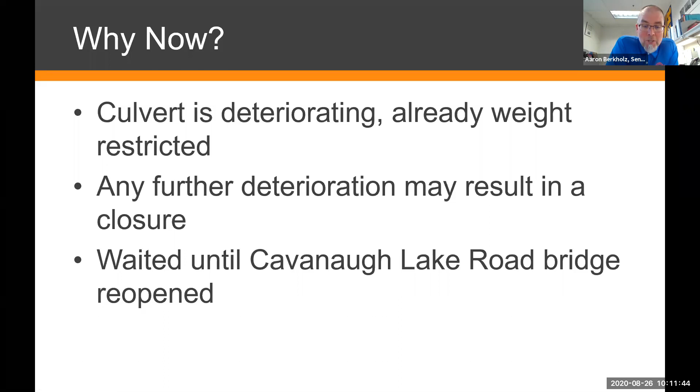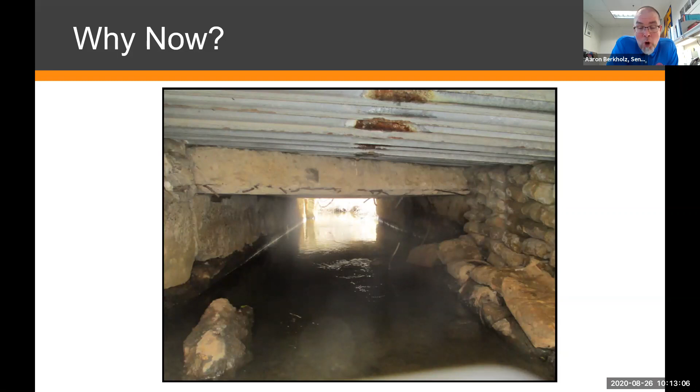So our intention in undertaking this project with Salem is to remove the existing deteriorating culvert. We'll be replacing the existing culvert with a new aluminum box culvert. We'll be installing new guardrail, and we'll be placing HMA hot mix asphalt pavement there at the culvert. It doesn't extend very far in either direction, but there will be new asphalt placed at the culvert.

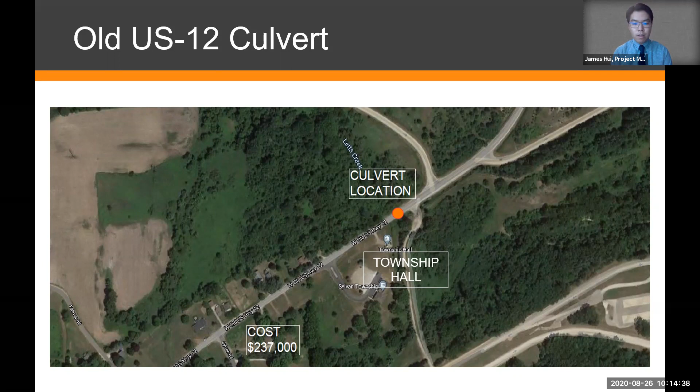So let's dive into this slide. Just to show you where the culvert is, the orange dot shows where the crossing for Letts Creek goes on old US-12. We will basically just be doing a hard closure at that orange dot. If you can see the driveway just northeast of there for the FCA proving grounds, and also the Township Hall driveway just southwest of there, that won't be in our closure itself. But we will have one barricade farther down by the ramp on the northeast side, and then one barricade down by Sylvan Road, just to inform people trying to drive through that this culvert is closed at this location. Next slide.

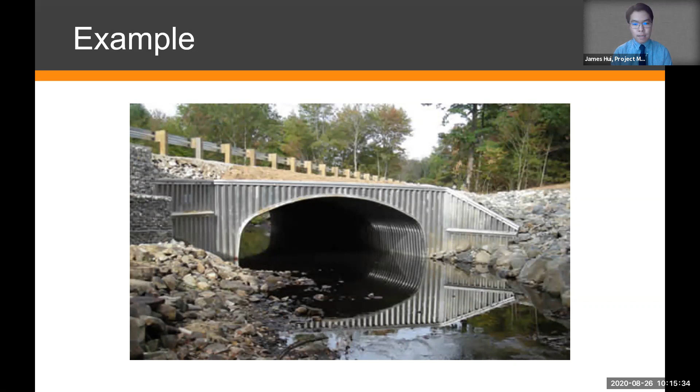So the construction schedule, we do plan on starting mid-September, and it will end mid-October. We're currently talking with Salem, our contractor, about trying to push up construction due to concerns for elections and the ballots. We don't want to deter motorists in the month of October. So we are working with the contractor, and as of now, we haven't gotten an answer back on if they could push up the work schedule. But the contractor did assure us that they can get done within a month. So we do hope to have this open back up in mid-October. This will be weather dependent, of course, and also dependent on contractor delays. But we will try our best to hold to the schedule for everybody.

We will be having message boards out on site in advance of the road closure. Salem, the contractor, informed me that they will be out early next week. We'll have two phases to the message boards. The first phase would be to inform the motorists of the closure on September 14th, if that is going to be the date that we continue to stick with. And then once construction starts, we will have a message board stating that the township hall and the police station will be open from the southwest side of US-12. Next slide.

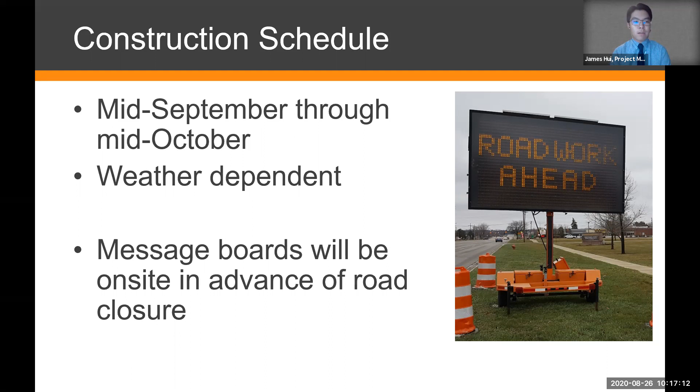So, impacts to traffic. All the properties within this project area will be open and accessible. Like I stated before on the map, it will just be the closure within 50 feet of that culvert that will be closed. So the township hall and the police driveways won't be affected by our project. Next slide.

As I mentioned before, election traffic: we do want to have it completed before election day, and hopefully weeks before that too, just for people dropping off ballots. We don't want to be the one in the way of voters on their way to voting. Following with this bullet point, Sylvan Township Hall will be accessible from the southwest for absentee ballot drop-offs or other business. Next slide.

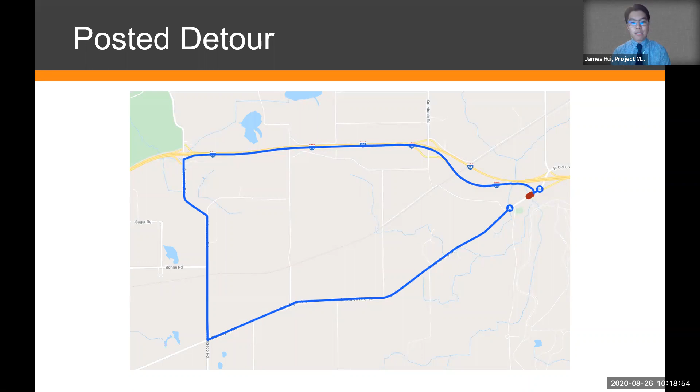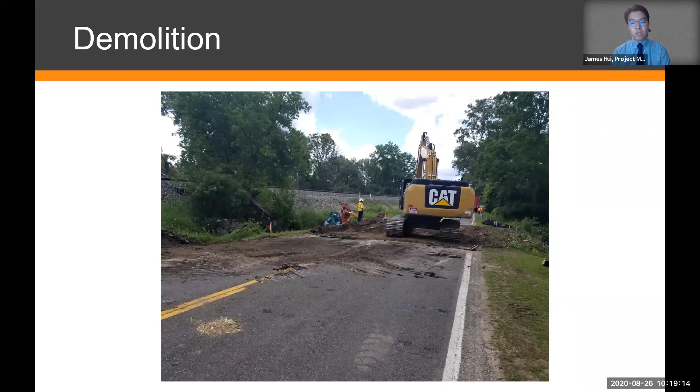And then it really depends on the contractor, but if they have enough space, they can also assemble the aluminum box culvert itself while we're removing the existing structure. The aluminum box culvert is basically a Lego set for adults. There's a lot of bolts, there's a lot of pieces. It'll take them a couple of days to assemble this while we get the road and the stream bed ready for the installation of the box culvert. Next slide.

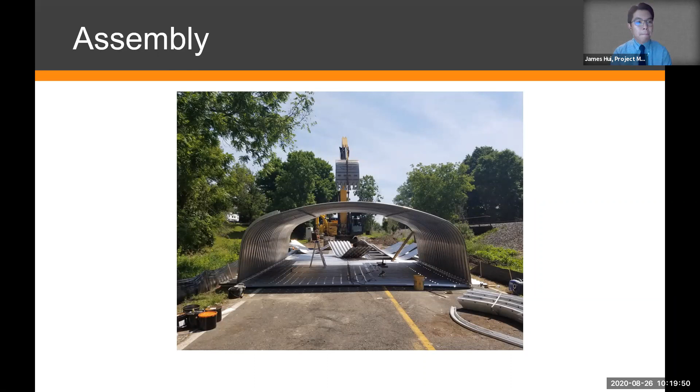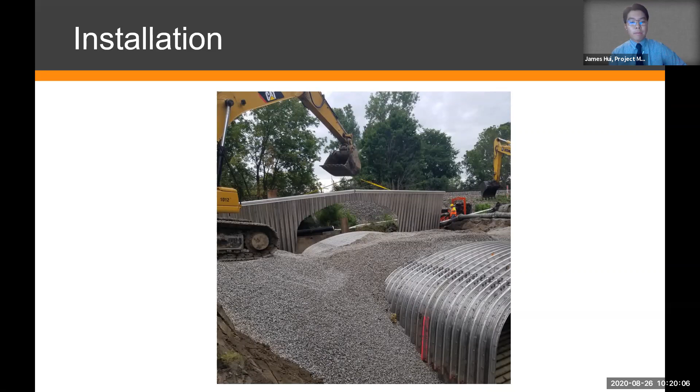So once it's put in and assured that it's in the correct location with the elevations, we do backfill with our typical stone that we backfill with. And this picture shows that. Next slide.

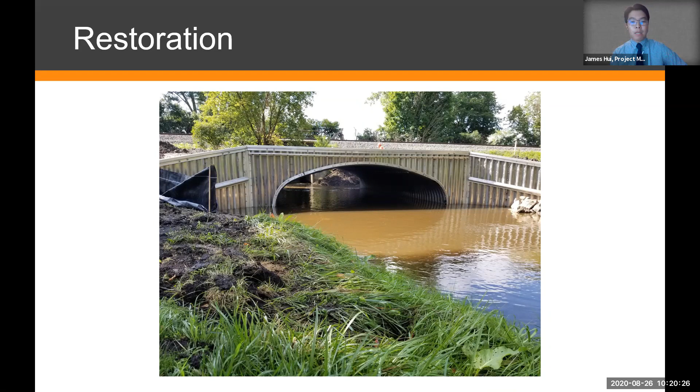And then here's the finished product of Cavanaugh Lake as of last week when I took this picture. We will work on putting stone near the outlets and inlets of the pipe just to make sure there's no erosion, and also restoring the property back to the way it was. Next slide.

Again, here's my contact information, and that will be my office phone number. And if you have any questions, please visit the project page at our website. If you have any concerns or problems, please give me a phone call or an email. I'm always here to answer your questions. Next slide.

By and large, anytime we have a contractor doing work on a project such as this, we will have an inspector on that job site with the contractor to ensure the work is done per plan and specification, and to be there as a resource for James, so that if a concern should arise, he can reach out immediately to that inspector and get some answers and find out if there's a concern that's up on the job site.

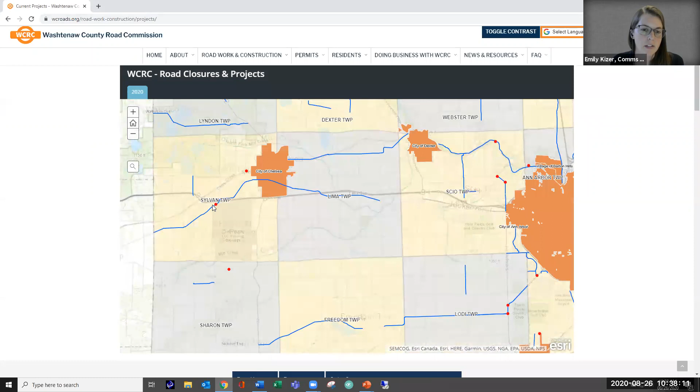And so that project page, you can find it on wcroads.org. I'm just going to pull it onto the screen here briefly. If you go to our homepage, again, wcroads.org, and you go to current projects here under roadwork and construction, you can see all of the major projects that we have planned this year throughout the county, but you can zoom in and go to our project page for the old US-12 culvert, which is the project we're speaking about here.

So you can see on this page here, there's all the information that we've kind of shared, the notice about today's meeting, James's contact information, and then down here is where you can subscribe to receive email updates. If you would like to, you could also just privately message me as the host your email address in the chat today, and I will add you to that project updates list if you want to do it that way too. So it looks like we've got a few more questions coming in.

Let's see. A few more concerns about timing, which I think we've addressed a lot, and we are going to do everything we can to get this reopened as quickly as possible. I think if you do have questions, Kathleen from Sylvan Township is asking if people have questions about this project, you can direct them to James or to Aaron. And yeah, it looks like all of these questions are kind of similar themes of concerns about timing, but again, I think we've talked a lot about that.

Are there any other questions or anybody that would like to virtually raise their hand to ask a question? You can do so by clicking the participants button and then the raise hand button, or by dialing *9. James and Aaron, anything else you'd like to add for the good of the order here?

I don't think so. We certainly have appreciated everyone's input. We recognize the concerns with the impacts on traffic. And as Emily and James mentioned, we're going to make every effort to complete this project as efficiently, but also as safely as possible, and provide a good long-term investment in Old US-12.